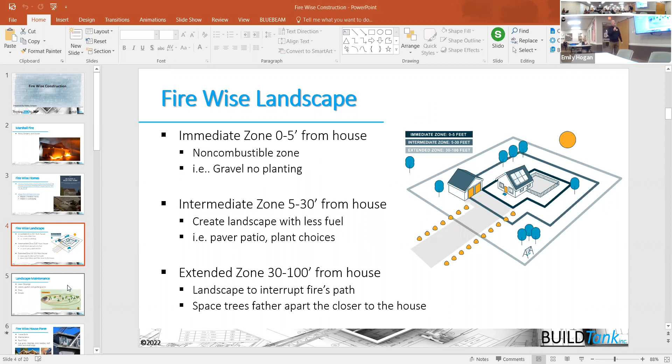And what we really see is that maintenance is probably the key to all of this. Ensuring that we don't have places where lawn clippings can stay, leaves in our gutters, trees, shrubs, just keeping everything maintained, especially as we move into the fall season and things start drying and falling off. We want to make sure we maintain this 0 to 5 feet space, and also the space just a little further out. Next.

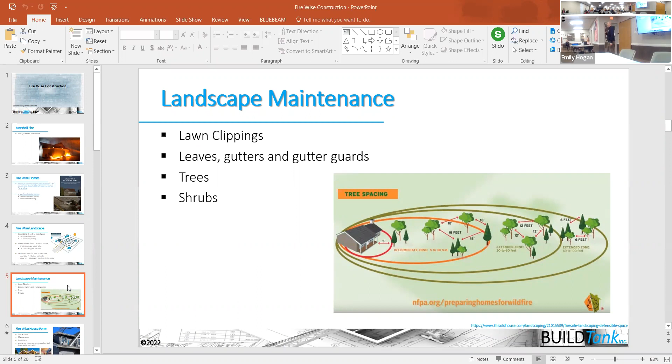Firewise homes. So we're talking about the form of the house, what it looks like and how simple the form is versus how complex. The more complex the form is, the easier it is for things to get stuck in those nooks and crannies.

So we're talking again a lot about form or maintenance of that structure. But if you are in the process of redesigning your house, in essence, the more simple the house is, not only is it more resilient to fire, but it's ultimately more energy efficient as well, because you have less surface area there that you have to insulate, and you have less separation between conditioned space and unconditioned space. So you have better insulation and those types of things.

So you'll see that a lot of Firewise construction is really right in line with a lot of energy efficiency. And from my perspective, I think energy efficiency is kind of the gateway drug into building science and understanding of how houses work and all the other codes that are out there.

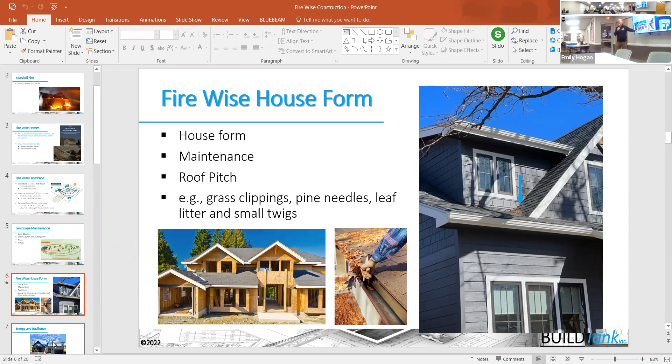So again, from a maintenance perspective, we're talking grass clippings, pine needles, leaf litter, twigs, all those types of things that are going to dry out over time and potentially be a problem for us. And then having simpler forms so we're not trapping those things, and then maintenance, obviously. So again, energy efficiency and resiliency really go hand in hand.

Whereas in our modern day, we want to be comfortable. Literally, we want to be able to walk around in our underwear from room to room and floor to floor and be comfortable, right? And if we don't meet that expectation, we often call the warranty department, or unfortunately, we might get into litigation.

So this change has really changed the way that we're building our houses as well, which means that we're making them much more energy efficient, we're making them much more airtight, and that all translates into more resilient homes, not just from an energy efficiency perspective, but from a Firewise perspective as well.

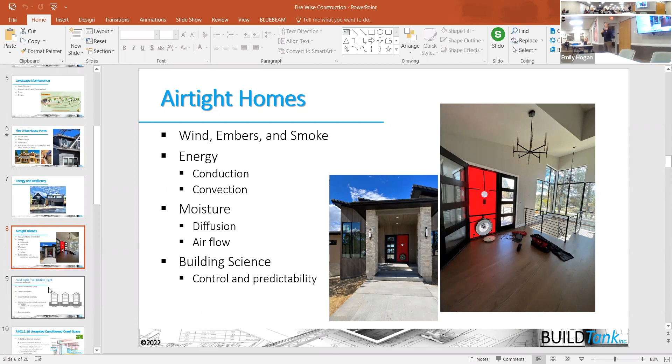And there are actually institutes out there that are building houses in these big warehouses. They're subjecting them to fire, they're subjecting them to wind, they're subjecting them to moisture, and they're learning more and more about it. The reality is that it's all integrated, it's all the same. The same building science holds true for all of these different reasons and helps us move forward.

So when we're talking about building tight, we also are talking about ventilating the house correctly. And for ventilation, we're talking about whole house controlled mechanical ventilation. But the other thing we're talking about with a tight house is conditioned crawl spaces.

So if you're going to have a crawl space in your house, you don't want to have a ventilated crawl space because you basically have a hole to the outside where embers can potentially come in to your house.

Conditioned attics: people still like vented attics, but if you're really concerned about fire, you would also move away from a ventilated attic and move to a conditioned attic, which is basically taking all the ventilation out, and what we call your building thermal envelope, the insulated part of your house that separates conditioned space from outside, goes all the way up and around your attic space.

Unvented roof assemblies kind of go with this, but if you don't have an attic space, you have what's called a raftered ceiling. You can build those in an unventilated way.

And then whole house controlled mechanical ventilation gets from the building tight side to the ventilation side. So we're building our houses tighter, but what we've learned about building our houses tighter is, yes, we're gaining control and predictability of the airflow, but we need some ventilation in the house for the occupants, but also for background moisture control and other issues.

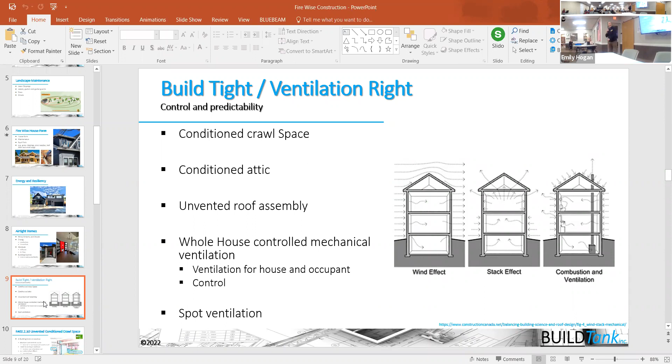So unvented conditioned crawl spaces, again, we're gaining moisture control. Just think of this crawl space as a tiny little basement. So I'm moving the insulation from the floor between the house and the crawl space to the exterior. I'm putting a great vapor retarder on the dirt floor. I'm slightly conditioning that space, and I've got circulation of that air.

So I've just made my space more energy efficient, more comfortable. I've gotten rid of any vent to the outside and I've made it more resilient as well. So this is kind of all technical stuff, but that's ultimately what we're doing. Thanks.

Sure. When you say conditioning it, is that what you're describing? Yes. Well, conditioning it actually means that I'm heating that space or cooling that space, just like I would my living room. Maybe not to quite the same temperature, but instead of having it connected to the outside in a vented crawl space, I'm actually actively conditioning it with my furnace. Yeah.

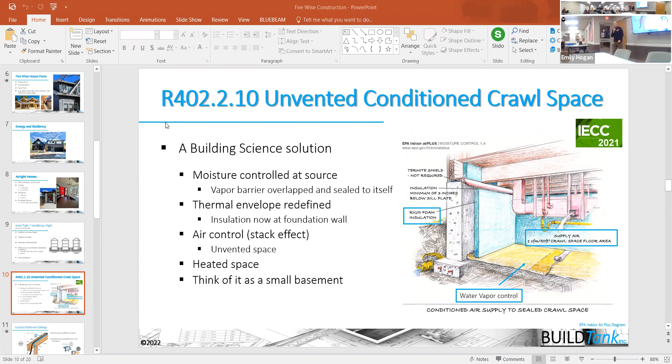So what we actually have to do is separate these two spaces so that air doesn't go through the insulation. So if I have fiberglass insulation or cellulose insulation in my house, it works the same way as the sweater works. Its job is to trap a pocket of air. That pocket of air is what gives you the resistance to the flow of energy from higher concentrations to lower concentrations, just like this sweater is doing.

It doesn't matter if I wear fleece or wool or cotton here, it's trapping a pocket of air, and that's giving me that resistance to the flow of energy. So if I don't separate these two spaces, these air pockets don't maintain their stagnant state, in essence, and give me that ability to resist the heat flow from inside to outside the house.

Oh, I'm sorry, I thought someone said... well, it was just me.

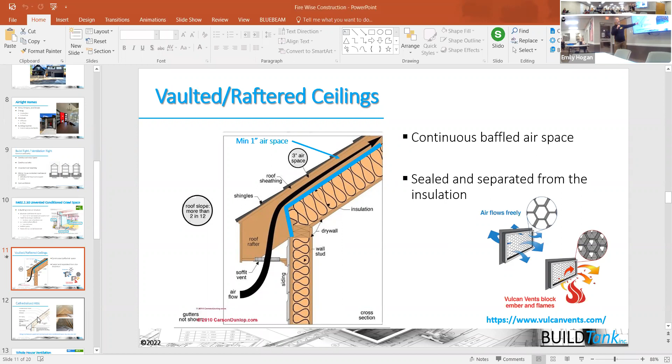If you condition your attic space here, so just like you take your crawl space and make it a small little basement, just flip the house upside down, and that conditioned crawl space becomes your conditioned attic. So I've moved my insulation up to the peak of my attic, and I'm slightly conditioning this space in here, and I've gotten rid of all the ventilation in that attic space. But I have to condition it and move air around it so that moisture and other things don't build up in that space there. But again, it's a means of hardening your shell.

It used to be that shingles had a warranty that was voided if you didn't ventilate. How does that get handled here? Sorry, can you repeat the question? So the question was, you used to have shingles and other roofing products where the warranty was voided if you didn't ventilate the attic. And there are still some products out there where that's the case, but there are different systems to ventilate from the outside if you have to. But often with asphalt composite shingles, you don't need that direct ventilation. So we should check the warranty of the shingle to make sure it's not voided by going to a conditioned attic. Yeah. Okay.

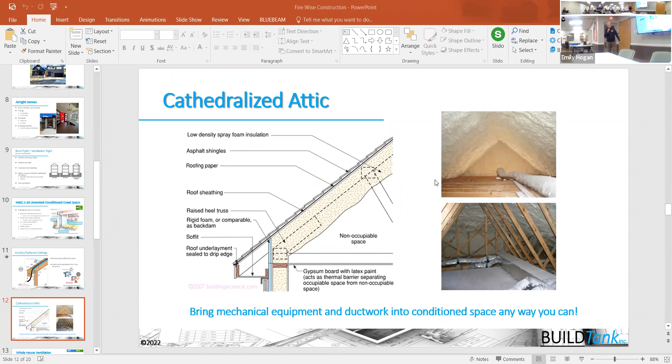Let's do the next slide. Okay, going into just a little bit of detail on this whole house controlled mechanical ventilation system. Because we're building our houses tight, we need to put a ventilation system into our house. There are three kinds of strategies to do that. You can have a supply ventilation strategy where you're pushing air into the house and in essence blowing that house up like a balloon. You can have a negative or exhaust strategy where you're sucking air out like you're sucking on a straw. Or you can have a balanced ventilation strategy where you're taking air into the house and out of the house simultaneously.

Now there are negatives and positives about all three strategies. If you're in unincorporated Boulder County, you are limited to doing this strategy. I don't believe that's the case in Louisville or Superior; I think you're given the other choices as well. So your builder and architect will help figure out what's the best strategy for your particular house, that meets the needs of the house, the budget of the house, and all those types of things.

But again, the big thing here from a fire-wise perspective is that you want to have control and predictability of this air coming into the house. If it's coming in and coming out, or if it's just coming out, you want to be able to close that off when you want to or need to, either because there's smoke in the air, there's pollutants in the air, or unfortunately, there might be a fire. So you want to make sure that you can close that off so you're not bringing any embers into the house.

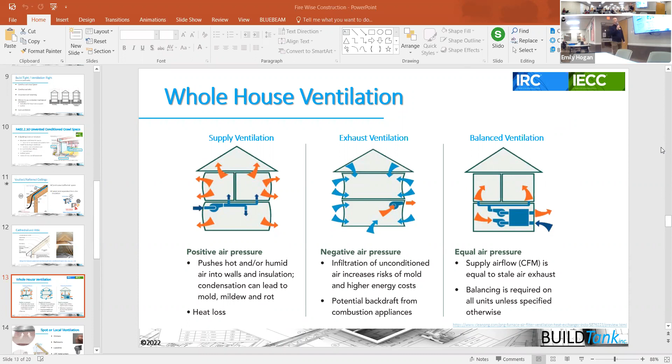Great, well, that's smart. So the comment was that this woman had a smart switch on her ERV, which is a balanced ventilation strategy. ERV is for energy recovery ventilator. So there's energy efficiency there, there's moisture management there, but there's also the potential ability to shut the system off and not bring in air when you don't want to. So, next. I have a question. If the builder is building to the 2021 IECC, will this be addressed?

If the builder's building to any of the energy codes from the 2012 on, they are required to build their house to a certain level of tightness and also ventilate it with a whole house controlled mechanical ventilation system, as well as a spot ventilation system, which we'll talk about next. They do have a choice depending on the jurisdiction of which strategy they want to use to do that.

So next slide. So this gets into what's called spot ventilation, and spot ventilation is ventilation that happens in your kitchens, bathrooms, laundries, and some strategies to help you there is to think about the screen size of the exit of that air. So these are all exhaust strategies where you're trying to get moisture that you're generating in your shower or your kitchen or your laundry up and out of the house as soon as it's being created. Because again, moisture is the thing that destroys houses over time.

So, if I have a smaller mesh size in this outlet and I have flap dampers on the outlet, I have better chance of ensuring that air isn't going to be sucked back in through those outlets, and the air might be carrying an ember or something. I'm going to help keep that ember out of the house. So those are things that you can think of.

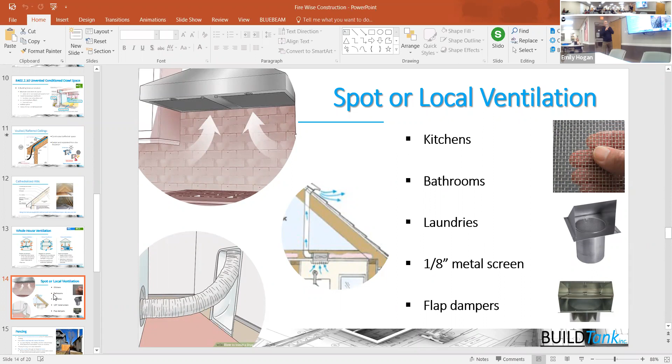Now, fencing is another big issue, and this is that same house you might recognize where the twigs and stuff were stuck in the roof. You might notice that this is mulch, wood mulch that is right next to the house. So that would be a no-no. And this house has gravel, but they're not maintaining it. So you have all the leaves from the fall falling there. They have a metal fence, but they have a wood fence that's connecting to the house here.

So these are some guidelines to think about with regards to fencing. Non-combustible fences, if at all possible, or at least keep the debris away from the fences, so that there is that same idea as the base of the house, where you're trying to not have grass clippings and leaves and whatnot pile up around the house. More airflow through the fence is better. And then vinyl fencing can work, but it is susceptible to that radiant heat of a fire or extreme weather event.

I'm so glad you're addressing fencing. Our fence faces west on that field, woods that caught on fire, and a lot of us watched it catch our fences on fire. So would a more open fence still be better in that situation where the wind was blowing all that fire right at the fence line?

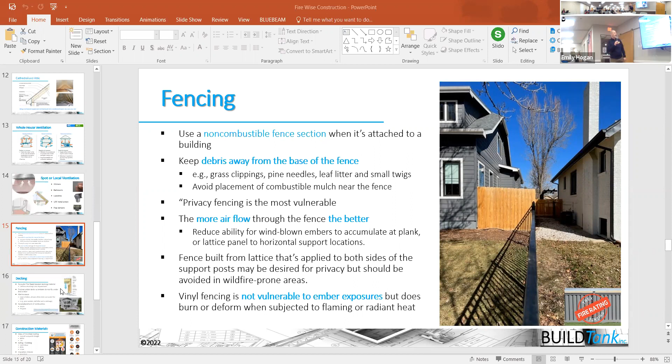Okay, so let's go to the next slide. Decking is another thing to think about here. So consider potentially fire rated or fire treated materials on the deck, so that if embers do fall on the deck, they potentially might not create a flame. They might melt. If you use one of these plastic or composite wood decking materials, they have different materials that might melt, but it might not actually create a flame.

They also talk about enclosing underneath the deck because embers and grass clippings and all those other things can get caught underneath the decks as well. And then something I don't have here that was also often talked about is that having this enclosure at the bottom portion of the deck in a severe wind event or wind-driven fire event can actually create a dynamic that pushes that wind and those embers up and over the house if it came from that direction. So another reason to consider enclosing underneath the deck area.

But again, as you'll see almost on every slide, it talks about maintenance and keeping everything clear there. I'm just struggling with this. Like, I know it's just half the budget, but sometimes things don't have these ratings, they don't have fire ratings. Like my windows, my builder says go to these windows right here. And they say we don't have fire ratings for any of our windows, and then I'm stuck. I'm like, should I be getting fiberglass ones, should I be getting metal ones?

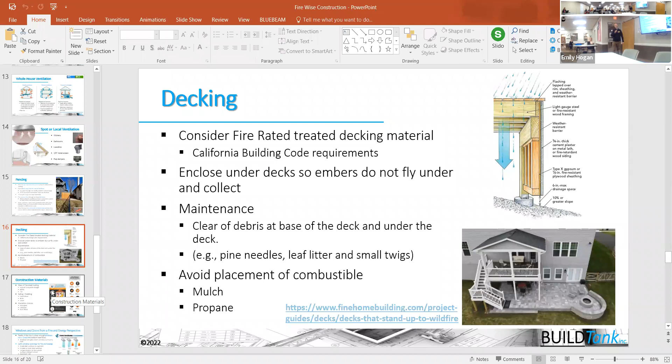Decks and fire. Yeah, this picture came from this Fine Homebuilding article there. Okay, so what's the next slide?

Oh, I'm sorry. Now, the NFPA is the primary sanctioning body for the United States, so National Fire Protection Association. They have a website, and they cover all kinds of stuff. I'm not sure that they have a list of building materials like she's asking for, though. I know they do roofs, research, they do lots of stuff. And I don't know about that.

We had these things called, everybody know what an I-joist is? It's a floor joist, but it's made with engineered lumber, which basically means that it's manufactured out of wood chips, so it's all glued together and whatnot. There was a product manufacturer that did that, but added a fire retardant to it. And they ended up having to go back into all of these houses and replace them after they were built. So there is reality to that, we're coming up with new materials.

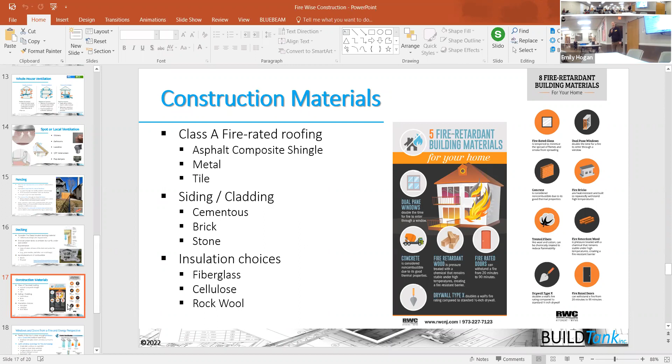Because everybody loves their windows, and we love to face them west, and we love to take in that view. And a couple things. One is that you have the potential of baking yourself in the summertime and just overheating the house. You have the potential of understanding more and more that windows are the weakest element in our house. From an efficiency perspective, my windows, even the Alpine windows that some of you are getting, the R value of that window is somewhere in the 5 to 6 range, maybe in the Alpine window. Typical windows are in the 3 range there, whereas your wall is somewhere in the 20 to 25 range

in the R value there. And so when we talk to builders all the time, they say, oh, I'm building this great wall, it's an R25 wall. And you do what you call an area weighted R value calculation. And that wall is at least half that 25, if not less, because of the window to wall ratio, the framing factors, and all the other things going on there. So from a resiliency perspective and from an energy efficiency perspective, limiting the windows is a good thing.

And when you're looking at windows and designing your house, you need to think about how do you optimize your views and optimize the light source that you want, that natural light, but ultimately minimize the openings at the same time. So maybe one strategy that's often used is you keep the same number of openings, but you downsize them each at least a unit. So they come in pretty standard sizes.

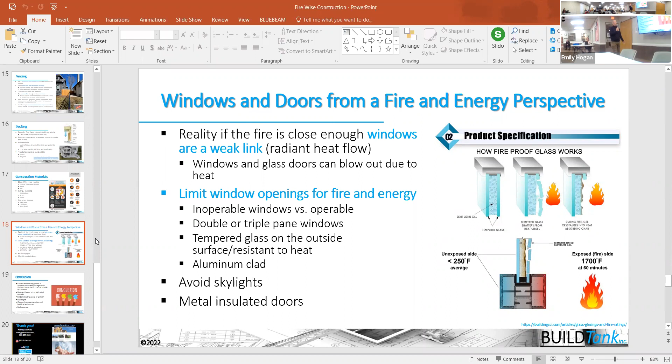So to conclude, again, embers are burning pieces of airborne wood. This is just kind of a descriptor of what an ember is. That's our problem. That's the main issue that we face. You know, we live in Boulder County, a high wind area. That's not going to change. It's always been windy and it's going to continue to be windy here.

So there are some simple things you can do with your structure and with how that structure is actually built to better protect the house, and that will also give you better efficiency, better comfort, lower utility bills, all those things. But it ultimately comes down to maintenance. So as you can, try and build as tight as you possibly can and ventilate correctly for your house. And then also, as best you can, choose the firewise or hardened materials. And again, from my perspective, it's choosing these materials from an embers perspective versus a radiant heat perspective.

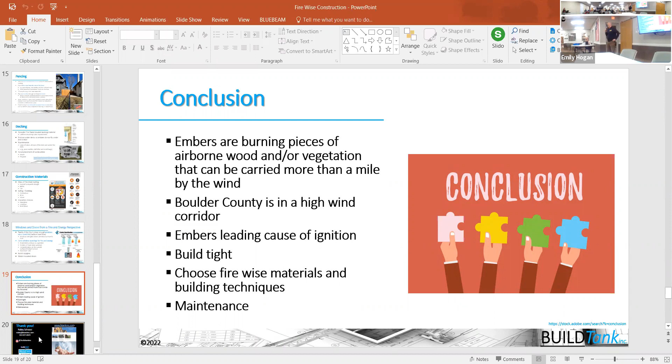So for me, myself, I'm not as worried about the Class A roofing material, for example, because I think I can maintain the house well enough and ensure that things aren't going to be piling up in my gutters and whatnot. I don't think that a random ember is going to catch that roof shingle on fire. That's my perspective, versus trying to ensure that my house doesn't burn down when the fire is right next door. That's something I'm not sure any of us can prepare for well. So, any further comments or questions?

If we wanted somebody to come and help retrofit and take care of the vents under the soffit and the roof and various places, who would we call? That's a good question. I guess a remodeler, and I'm not sure that there's anybody yet that is specializing in that. There might be in the foothills, and you might be able to bring somebody down from the foothills, but I'm not aware of any.

But I am aware that Boulder County, maybe you can help me, Lisa, has a wildfire prepared program where they will come and do an audit on your house and give you suggestions from a fire perspective. So yeah, you've probably all heard of Wildfire Partners, that's potentially being expanded under the 1A funding. So they have that program in place and it will be getting expanded. Yeah, and I believe that would be through Energy Smart or something, so it's open to the whole county, eventually.

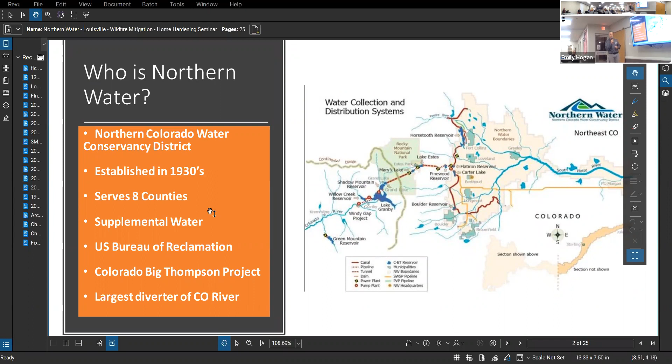The water comes through a tunnel and then it is stored in terminal areas, including Boulder Reservoir, Horsetooth Reservoir, Carter Lake, and more. On the way, it also produces quite a bit of electricity through hydropower production, which is how it's repaid for the project over the years. So currently we are serving 1.5 million people and 614,000 acres of irrigated farmland. But a lot of the water is moving to the cities from the farms because of the urban growth that we're experiencing. And at the same time, the water we're collecting is under threat from climate change, and we've seen 20+ years of reduced water availability.

And so what we would like to do is be able to serve the cities, especially Superior and all the cities here in Boulder, as well as those up north and out east as well, and keep agriculture in production and sustain the environment. And one of the ways we're working to do that is by helping to use less water in the landscape and keep it resilient, very attractive, good looking and adding property value. Let's go to the next slide.

So we use Colorado River water, and that water is generally going down into Lake Powell and Lake Mead, which you may have heard are at their lowest levels since they were filled from their original construction. And we are being asked to contribute water to those reservoirs by using less in the eastern slope. And so what we're trying to do is work with all the cities we serve in the new construction and in rebuilding or modifications to existing landscapes. And we're doing that through helping cities like Louisville with Lisa to integrate water efficiency into land use planning. And when this fire occurred, we saw an opportunity.

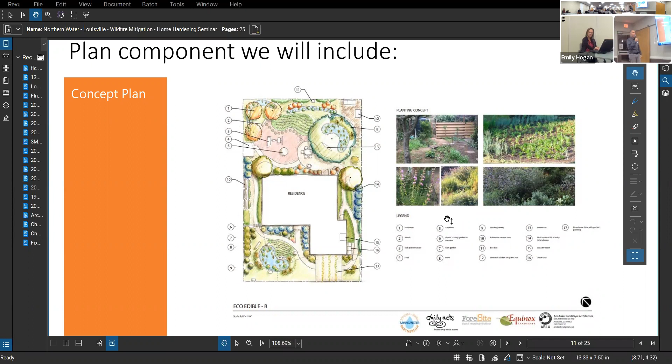Next slide. So these are the renderings, and on the website, you can go through a progression. So they show you what a new planting looks like, and then as those plants mature. Typically, it's a little less expensive to buy smaller plants, right? You can buy a 4-inch pot instead of a 1-gallon pot, or a 3 or 5 gallon, and you know what those plants look like. So a landscape design will include what the plants will look like at maturity, and they kind of fill in the space.

So there's a setting of expectations necessary for these types of landscapes. Because they're not turf, you don't get that immediate blanket effect of rolling out a carpet of lawn. And lawn has its benefits and its trade-offs, of course. It is easy and it is relatively cheap to install, and we're very familiar with it.

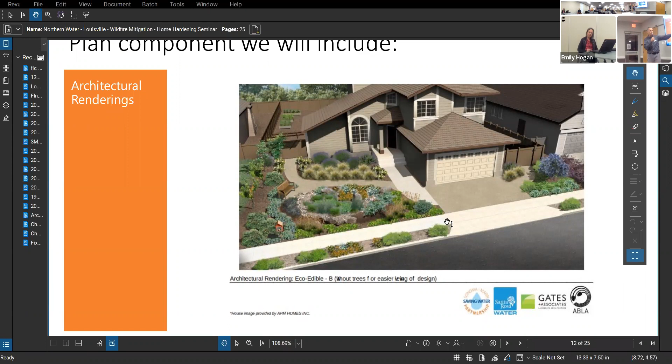A planting plan like this has very full coverage, but you see it has a lot of features that I think are pretty attractive. You've got the bench, you've got perhaps some food areas here, you've got a lot of color and year-round interest. And here at the street strip, which are awfully difficult to irrigate efficiently, you've got some nice planting material here. And all of these would meet the typical expectations of most homeowners, I would think.

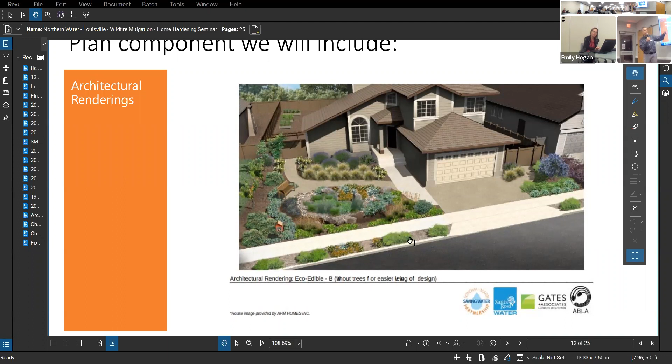And so we're hoping that these kind of features can be included, one or two architectural renderings. That's the same one we just saw, but you'll know that the driveway's on the right here, without trees. And then there's one where you can plug in and the trees are in the front, like that previous picture. Next slide. So this is a permit cover sheet.

It's a little bit more restricted out there. They have other rules that the folks have to follow. I would not expect that Louisville would have a permit list quite like this. We don't actually have any permits for landscaping, with the exception of a little bit for your irrigation system. Some of your HOAs might want to review these, things like that. And other jurisdictions that Frank is planning this for might have permits. But for Louisville and Superior, you don't have to do this.

But can you also mention the fencing from the house to, was it 5 or 6 feet from the house? So yeah, just a quick note, in Louisville anyway, if your PUD requires a wood fence for that portion of the fence that connects to your home, you do not have to install a wood fence there. We, as a local government, can't compel the HOA to change their rules. So it's state legislation and other legislation like that. And you also need a permit.

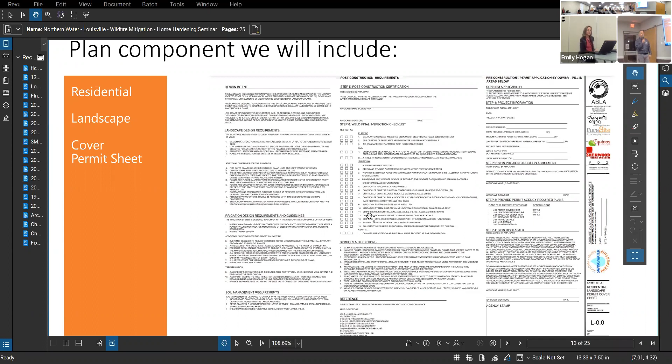And that's what's been difficult. Originally we thought we would just make these for Louisville, Superior and unincorporated Boulder County, and if that was the case, we would be pretty sure about what to include here. As we seek to make these more available across other areas, this gets more complicated. So we're trying to figure out how to make it effective and appropriate for different areas, if it was down in Durango or Denver. So we're gonna lean on the consultants for the expertise in that regard. Next slide. Oh, there we go.

So this is a layout plan of where things are planted. Those little circles there refer to the plants, each by type. These are always hard to read, even if you do this all the time. It's a print of, I think, a font of 2, so it's a little difficult. But this gives the direction to the landscapers on one, how to bid the project, and two, what to do with the materials when they get there. And it should also help with the site grading and all the preparation. And Robbie, if I get something wrong, let me know too.

So the idea is that you would have a plan that is ready to go, so that if you were choosing the eco-edible option, you would be fully equipped to receive a bid from someone, or to just give it to your builder and say, go make it beautiful, and they would be able to do that. So this is what they delivered, and I think they did a pretty good job. It's my experience that this would be a nice place to stay. Any questions about a landscape plan? Have some of you seen these before, or is this familiar information?

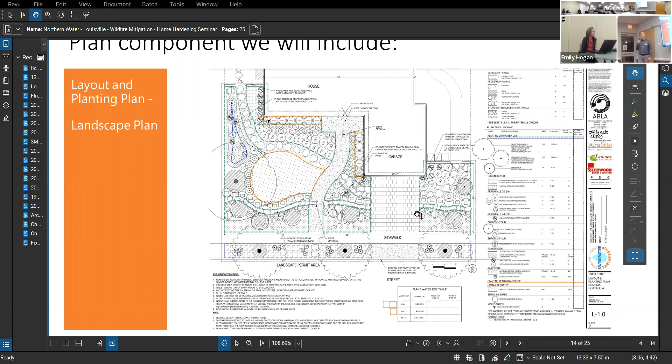If they created the template, how much specificity on the plantings, on the types of plants in particular? Pretty specific. So most of these come with what they call a plant palette. It's going to have the type of plant, the size, and the number. And then it also will include the water use metrics as well as the maintenance. Well, the maintenance manual would really refer to what's included in these. And many of the maintenance steps are relatively consistent among these, but not always. So here, let's see if this shows.

Shrubs. I can't really read what that says, but there's a number of those in a certain gallon size. Looks like plant quantity is 9. And so we would be able to see what the shrubs are, 3 to 6 inch, full sun, the rain garden here. So there's likely a downspout right here, DS, this thing going in.

The rain garden would have a depression where certain types of plants function well when they're either wet feet or not. And so it's probably piped from the house, as Robbie said, and then it would probably go into a depression. Actually, it's probably here. There it is. Downspout goes underneath this walkway and then is out in this area. And so this would be probably a really neat feature.

And it would keep that water on site, and effectively use it for reducing the irrigation demand in this landscape. And if they were clever, they might do that in multiple spaces. So, yes, ma'am. Yeah, we had a neighbor who took out all her sod and put in a xeriscape front yard. And in the summer, it's gorgeous, and in the winter, it's completely dead and it's rock.

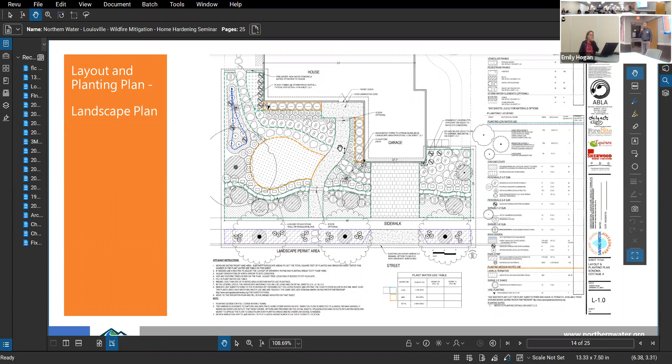Well, that's kind of you, Lisa. We don't really have a way to interact with the end water users. What we do is provide that raw water to the cities that then treat and deliver it to the residents, schools and businesses. How about we go to the next slide?

So this is an irrigation plan, and it would simply show what type of irrigation components are underneath so that they would be all set beforehand. So you know where your drip would be, your valves, your isolation valves, your valve boxes. Netafim is actually an underground drip that has an emitter every 12 inches. The idea is that you would have the details to plan this, and it would be bid, installed and then checked, so there's no leaks and no performance issues.

Pressure regulation is a very common component now, so you don't have the high and low pressure areas. Those are really good water conservation measures that we would seek to require in these, so that it would be smart from the start.

You definitely still have to water your yard. Don't question it. You definitely are going to have to.

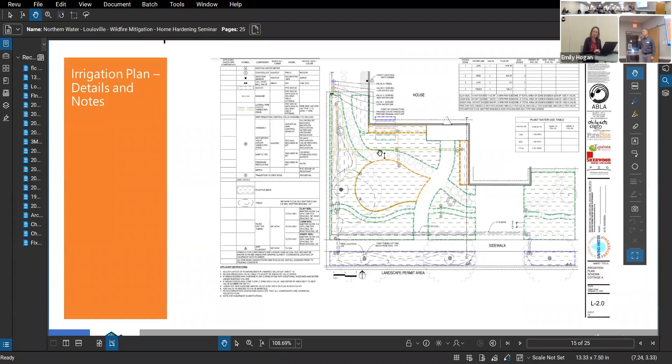One of the beautiful parts about native grasses is that after establishment, it's possible for them to exist without water on their own. If we get enough precipitation on a relatively regular basis, they can do pretty well. They might not look as uniform as if they got a little more regular water, but they can have the appearance of almost like a lawn. The color's a little different, the texture's a little different. So some of these can be tweaked over time if we get relatively regular precipitation.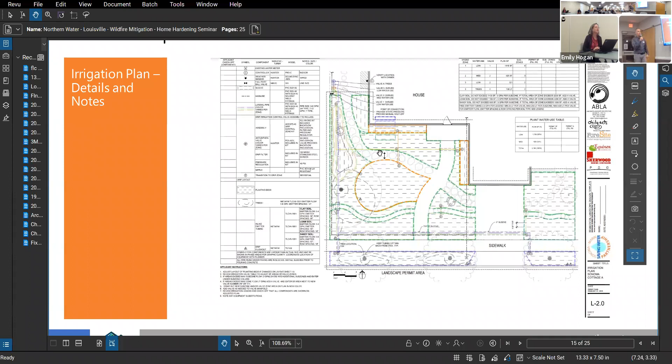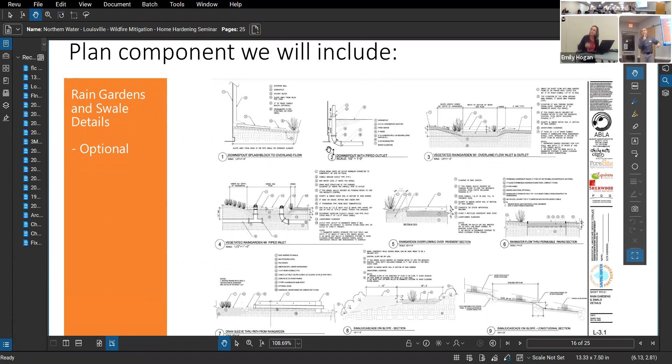So you can see the walkways here, then probably some Netafim. So this would be part of the plan. Next slide, please. And then if it makes sense, rain gardens and swale options could be included. And then this is the design behind those. So the depression with an overflow and a drain. Here, if you had the clay soils, they would be very slow draining because they have a very tight pore space. So sometimes these may not be necessary.

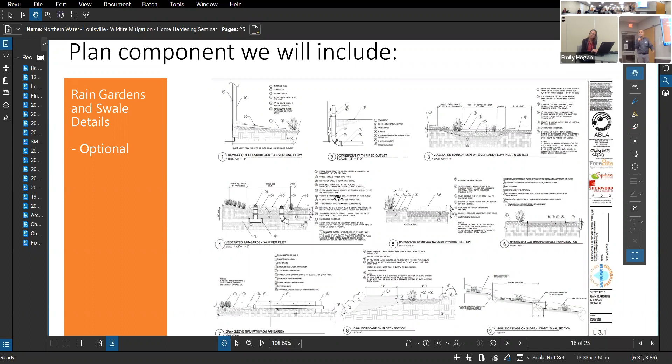We're not certain that this is something of high interest. So if we had an outreach meeting with folks in your position, they might say, yes, we would like to have these included, or no, that's not really important to us. Believe it or not, rain gardens can actually be quite beautiful because you add a couple of swales and you have some more height in your landscape. And so it can add another dimension that many people aren't familiar with. And they're very easy to take care of. They just require a little bit of periodic clean out. Let's go to the next slide.

How are we doing on time? We're doing good. Okay. Good.

And then the idea behind the rain barrel and rainwater harvesting can occur too. As you said, you can have those two. Usually the downspout has a direct input into the barrel, and then it's got an overflow device. So if you get a really big event, it'll have a little flapper that will activate, and then it'll overflow out into the regular gutter.

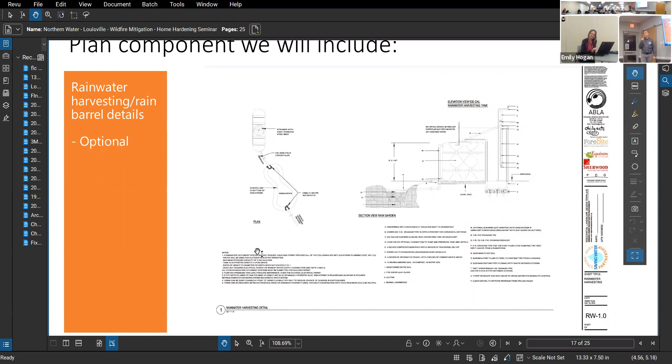There are some constraints around how long you're supposed to wait to use that water. Technically, within 72 hours, you're supposed to release the water from the rain barrel so that you're utilizing it in your landscape. Some of these larger cistern concepts here are a different story, and I don't think we would go to the effort to include those. I don't think it's commonly used here, not in the residential space anyway.

Next slide. And so what we would look to do is demonstrate how much water these landscapes would use, and then how much it would cost to own them by comparing them to the water rates that your utilities charge you. And we would compare those to our control, which would be a turf dominant, 80% turf, 20% shrubs landscape. And so we could say something like that may take you $1,000 a year to irrigate. And perhaps these would be 50 to 75% less. And so you could expect to spend that much less on your water. And then you could also equate some of the maintenance.

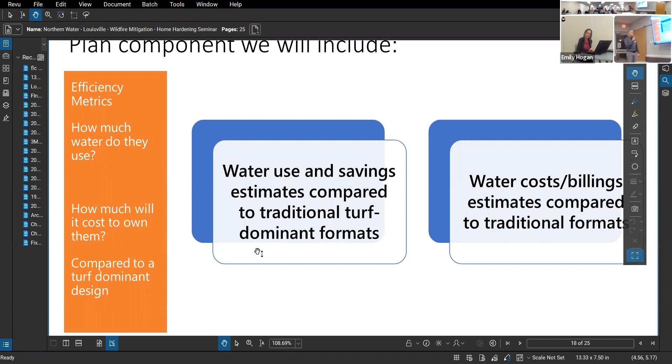I'm getting tired of mowing lawn as I get older. And so, I mean, my dad did it, right. It's not this thing we have built in, but sometimes I think I have other stuff to do with my time. Maybe you feel the same way. So part of me is interested in a lower labor landscape. Maybe that's how we should call it. Instead of lower water, lower labor. It's more appealing. But we want to give people an idea of what you can save both in water and costs on doing this.

Next slide. So one of the biggest features of the Sonoma's product is a cost estimate. And I want to be clear, I'm sorry, I messed that up. It's a cost opinion. It's not a cost estimate. And it's hard to get your mind around because one of the challenges is no lot is really the same size, right? And so as you get a bigger lot, the costs will change depending upon what features you want. And that was a little complex for me to understand.

And of course, these prices now are out of date because this was pre-pandemic, and also pre-inflation. So we really have no way to really know how accurate they would be. We would like to be able to include this element. I would expect it was quite complicated to create in a way that seems it would be accurate. But you can get some ideas here.

Grass plugs are what's required for that Dog Tuff turf. So you can't get it in sod. You have to put in these little plugs and you put them in a matrix and then they quickly grow in, generally within a season. But that's a different format than sod. So, you can get an estimate for what those are, and they're made up here at Bath. If you've been to Bath Nursery, they grow the Dog Tuff plugs, and you can look at the different options here.

So the idea is if you can pick and choose which models you want, you can get an idea of what it should cost. And some of these are relatively static. Trees might go up, but there's been a huge demand for trees recently. So 2-inch caliper trees, as many of you know, are not easily available anymore and the price has shot up. So this is something we would like to include, but we're not absolutely certain that we can.

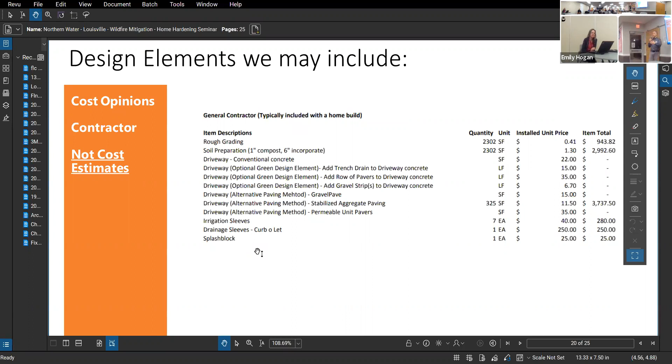And so this is the contractor side of what it might cost from a contractor's perspective. I really don't know what kind of cost increases occur in the contractor space, and I imagine that's difficult to navigate sometimes. There's spreadsheets that these folks deliver to do this work. So in those spreadsheets, you can plug and play which options you want and get those cost opinions to help you budget for these investments. We would like to be able to do something like that too.

Next slide. And the optional items too. So if you added in different things, they give you, it's just like buying a car. This is, I think, the extra stereo piece or something like that.

Next slide. So they made a printable package so that you could print this out and in theory, give it to your builder, take it to Lisa and have it retained for your records. And I think this was a feature that they added in. It's a very nice option. I don't know if this is a common approach in the building circle, Robbie, but I think this was a nice element that they did. So let's go to the next slide.

So I want to reemphasize that the fire protection is an element we would want to include in these. We would want to address what Robbie shared with you on some of the elements around fencing and decks and next to the foundation. There were questions about shade structures. What can we do instead of trees? Well, maybe there's a shade sail option. The permitting, Lisa's clarified that for us.

What kind of slope requirements? I think that the landscape templates in Sonoma have a maximum of 8%. And they said, if you're going to have something that's more severe, then you'll have to do a different design because of the implications for what that needs. So there are some limitations to these designs that they certainly won't address. And then we would like them to be appropriate for the neighborhoods like yours. So I'll show you what some of those look like in the next.

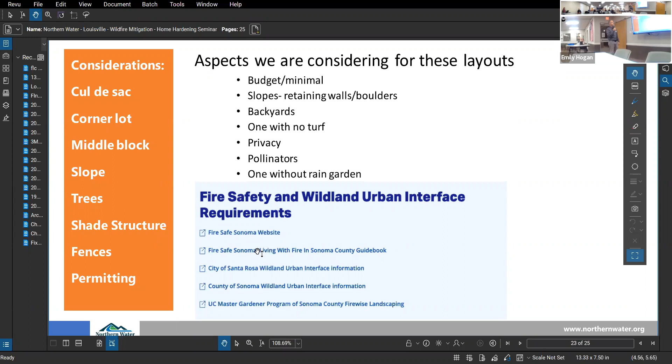Okay, would you like to see an inclusion of organic wood mulch as an option and as a feature? I guess, I mean, that's what I use. I guess that's what I'm asking, what else is there? Because the last slide had something called arbor mulch or something, the one with the planting plan? Backward. Arbor mulch, yeah, I don't know what that is. Okay. Yeah, and the cardboard, I can't imagine cardboard being non-flammable.

So sheet mulching is, you can call it a lasagna mulch, if you will. It's popular in California. You put a layer of cardboard down and you put a little bit of that wood mulch and then another one. And what it does is it creates an excellent weed barrier. It also allows the water to permeate down and then it decomposes. And so it's a low cost, low labor way to do it. And it can actually look pretty good too. If you cover that with a little bit of wood mulch, you'll never know it's there.

And the weeds really don't compete. Whereas with wood mulch, weeds love it. They can germinate in it and they come right through it. And it does require a bit more work. We found that with the rock mulch, the squeegee mulch, it's easier to pull those weeds out. So it's a trade-off. Okay, so my question, I guess, as you're looking through this, is what to mulch with, just generally.

We'll provide better guidance to you, I think, particularly, but I do think generally, that first 5 feet is the most important. Having this squeegee mulch or pea gravel mulch is likely to be recommended rather than wood mulch right adjacent to your home.

I do see a hand raised online, so Rachel, if you want to unmute on your end, go ahead. Can you hear me? Yes. So just real quick, what about landscape fabric?

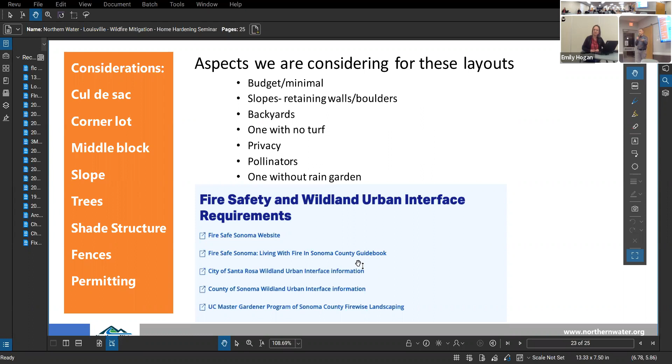And so I would think that we're going to perhaps resist including that as a typical practice. For one, it would save you a ton of money, and two, it just doesn't do a lot of good for you. The weeds just grow on top of it. They're smarter than the fabric, so it's not like you're getting a lot of benefit.

Does that help your question? I've viewed it already. Okay. I'm looking at the owl as if she's gonna answer that.

Okay. Let's go to the next one. So this is the Sonoma Marin Water Saving website where they have these located. And if you haven't seen these before, each of these is clickable to see the details. And it's a really well done website. They have the renderings there. They have the packets for printing. So you can go through each of the elements, and then it's a little complicated, but you have the features

to shift around. So here's a native one, to speak to your question or your statement about natives. They want to do the same thing. It's a beautiful place in Sonoma, and so they're very conscious about their environment. Here, the cottage is more of a formal look with rows and kind of an English approach, right? And you get a little bit of turf in here. And so the turf could be native grass, which is really easy to make a turf-like version, including blue grama and buffalo grass. You can do an 80-20 mix of that.

It looks like regular turf. It can be left unmowed and it grows to about 7 inches and has these beautiful little seed heads. And it doesn't require but about 40% of the water of bluegrass. So you can get that turf appearance if you want, or since this would be potentially a good location for dog turf, you can have the same thing. You would just need a little concrete barrier between the dog turf because it would move into all these other

areas. And then, so here's a cul-de-sac one that we're seeking to include, and then an eco-edible, both for humans and bugs and animals too. So they have these here, and you can click in and you can see all the plan attributes.

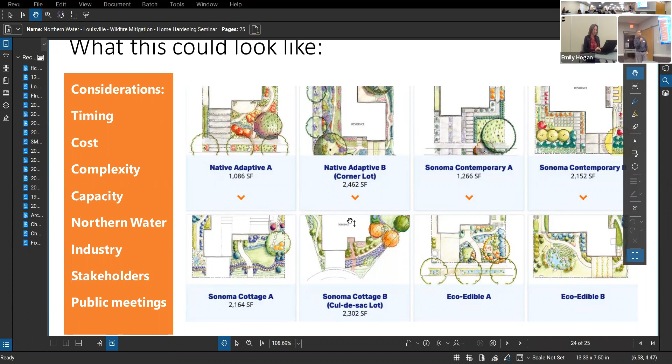Can I ask a question? Sure. So what is the timing, and for those who want to do this yesterday, are there actual landscape companies that are expert in this that we would work with directly? Well, the landscape industry is relatively unregulated in Colorado. Okay. And so it's hard for people to pick certain entities. Luckily in Boulder, you have some providers that I think have more of an interest in this than in other parts of the state. Okay.

And so there are people who have certifications. We do provide certification testing. We focus on the irrigation side of things. We want irrigation practices to be top-notch in landscape providers so that they can deliver you high efficiency, high performing landscapes. For the other portions of this, there are companies that are listed on the Associated Landscape Contractors of Colorado

website. That's alcc.com. Those people tend to be firms that are credentialed, professional, experienced, and they tend to have high aspirations for design and performance. And so they have people that tend to lead the industry in adopting water efficiency, climate resilience, fire resilience. So I would say that's a great clearinghouse for some of the best performing firms.

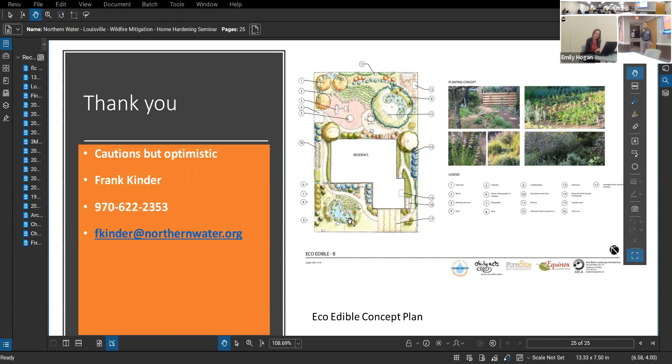This is my last slide, but just kind of an inspiration. And I think we have a little bit of time for remaining questions with myself and Robbie.

Would WaterSense be a good resource for them? Don't they have the WaterSense certified landscape? So yes, I'm a big believer in the WaterSense designation for homes. That is a third-party certification similar to Energy Star. There are providers in Colorado that can certify your home for WaterSense. It includes an indoor portion and an outdoor portion, and it's designed to be quite a bit more water efficient than a standard code compliant home.

The providers will do a water use estimate for the landscape using what's essentially a water budget calculator. And they'll put in the features that you would have, and that'll tell you how much water is used based on the irrigation type, the types of landscape components, how much turf, how much plants, the location you live based on your zip code and your zone. And then there are people that are certified to be WaterSense providers. They call their portal WaterSense Find a Pro.

And in order to get on the WaterSense Find a Pro portal, you either take the Irrigation Association classes or those from one called QWEL, Qualified Water Efficient Landscaper. So that's another place to find folks that are trained. In fact, the Sonoma Marin Water Saving Partnership came up with QWEL to raise the bar for landscaper performance. I'm personally QWEL certified, and I make sure my team is too. And you can get QWEL certified here in the state.

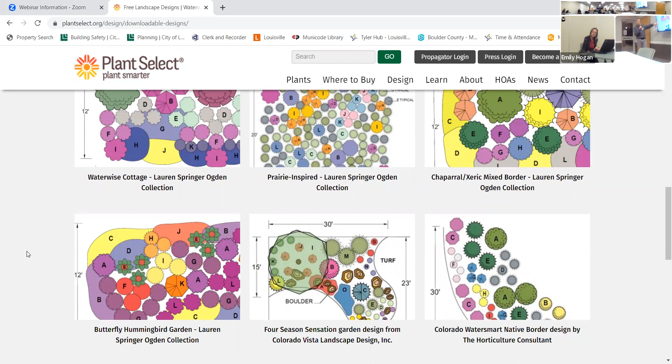And then some of these could be translated into a landscape for you. They would just need some help from a landscaper to understand where irrigation would go. So these could work for a replacement of an existing landscape. If you had overhead sprinklers and you put these in, which is a viable way to save you a ton of money. By the way, if you take out the turf and you put in the plants, you can still do overhead and you can have a viable garden. You just water maybe once a week or every 2 weeks.

So Plant Select has a list of the plants. If you go to the main website, there's Find a Plant, and in there you can see all kinds of cool things. So you can look at trees, they have shrubs, they have perennials, annuals, and it's really neat. So search right plant, right place. I spend way too much time on here. But it's really inspirational because you can pick by the features you want and the type of plant you want, and even the color and the bloom time.

And you can go in there and it can show you what it has available. And then all of these are available locally too. And they're in different size pots and plants. So if you haven't been here, it's kind of a fun way to look around. Like this is actually a native plant, little bluestem, and the Standing Ovation is a version that was found to be upright. So it's the best of some of the natives and those that want to be natives.

I should stop. And if you want to go to Sonoma Marin Water Saving Partnership, I can show you that. Or we stop for questions. Yes, ma'am. I noticed on one of the designs that there was mention of gray water. And that's not something we talk a lot about around here. Are there people using gray water systems? Are there ways to implement gray water systems?